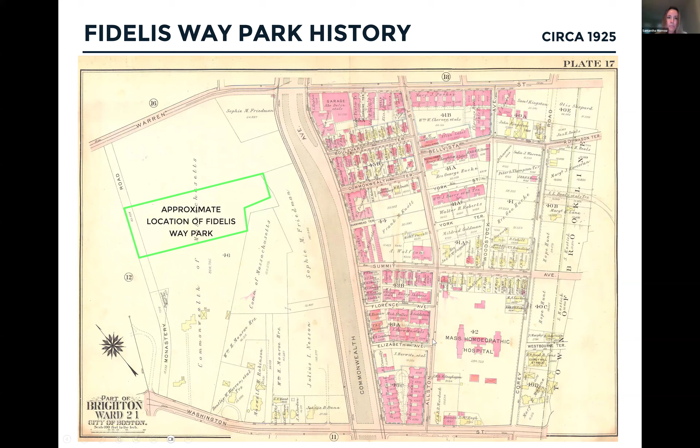That brings us to 1975, which is when the park was constructed. For those of you here familiar with the park, you'll see this has not really changed much from the original design, and today's park design elements remain in the same orientation as shown in the plan above. The initial design of the park included those basketball courts you see today, the plaza area, and a little tot lot playground with lawns surrounding either side, and walkways surrounding all of it. In that tot lot area there was a water play feature.

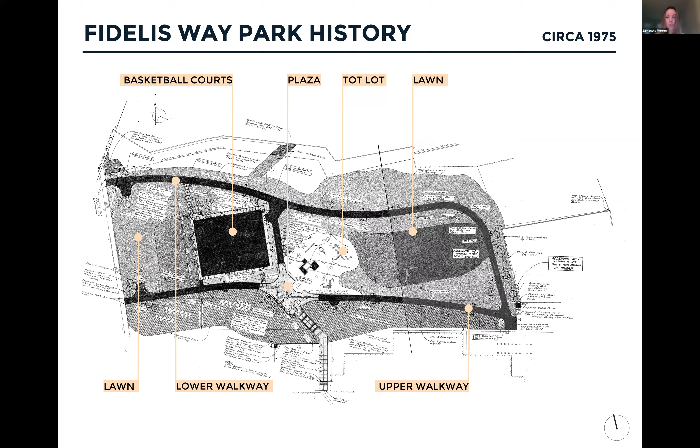We also noticed in this plan that a lot of the trees you still see today surrounding those walkways were planted during this design. Another thing we noted looking at these plans from 1975 was that there was a lot of drainage infrastructure installed, so various drains and manholes throughout the park. So for us, we thought it would be important to make sure all that is functioning properly in the next steps. Next slide.

Again, on the left we have a zoomed-in image of those plans from 1975. On the right, this is showing the next time the park was renovated, in 1993. That design really was just focused on the renovation of the play equipment itself. It removed that water play unit and put in new play equipment, which is also the same equipment you see out there today. They also added those large tulip trees surrounding the playground today, planted during this '93 redesign, and installed some new water and drain lines. But other than that, in '93 that was kind of all that really happened. So the rest of the design of the park and its elements remain mostly unchanged.

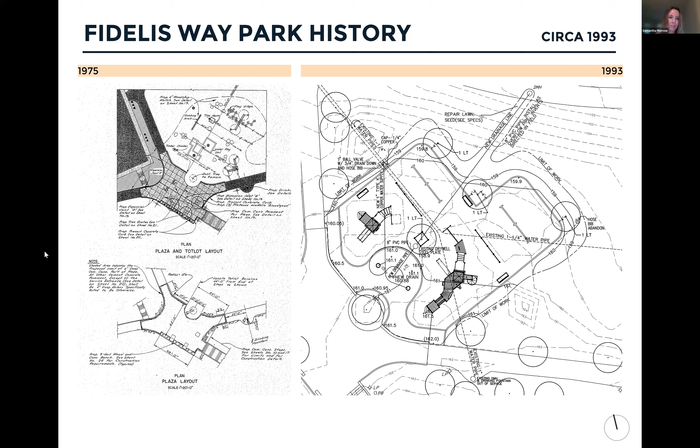Before we talk about the park, we're going to talk a little bit about the neighborhood around it, starting with a slide to help orient ourselves. Fidelis Way Park is adjacent to Commonwealth Ave, located between Washington Street and Warren Street. If you haven't been to the park, you might not have seen it because it does not have any street frontage.

But there are a lot of landmarks around it. To the north, labeled number 1, is Brighton Marine Health Center. To the south of the park is the Boston Housing Authority Commonwealth Development. At number 3 is Overlook Apartments, which used to be St. Gabriel's Monastery. Number 4, on the corner, is the former St. Elizabeth's Hospital, now Boston Medical Center Brighton. And at number 5 is Brighton High School. People are probably familiar with this block, and Fidelis Way Park is right in the center of it.

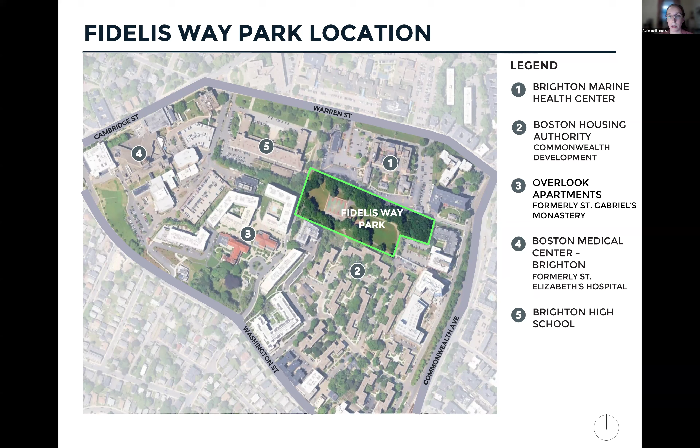When we started to study this neighborhood, one thing we really noticed is the density of community institutions around this park. Within a 5-minute walking distance, you have 3 different hospitals or health centers, 3 schools, and of course the BHA Commonwealth Development. Going a little farther, into the less-than-10-minute radius, there are some religious institutions, another health center, the Boston Public Library Brighton, and the BCYF Jackson Mann Community Center. Our takeaway is that this area brings a lot of people in - it's probably not just neighborhood residents using this park, but also people attending school here, working here, or coming for medical appointments.

In addition to all these community institutions, there are also other parks and open space. There are no other parks within a 5-minute walking radius, but there are 4 within a 10-minute radius. Right at the edge of that radius is Brighton Common, a long space with a stage and amphitheater, kind of an event space. Number 3 is Joyce Playground, which in its amenities is similar to what's offered at Fidelis Way Park - a playground, sports courts, a water play feature, and some public art.

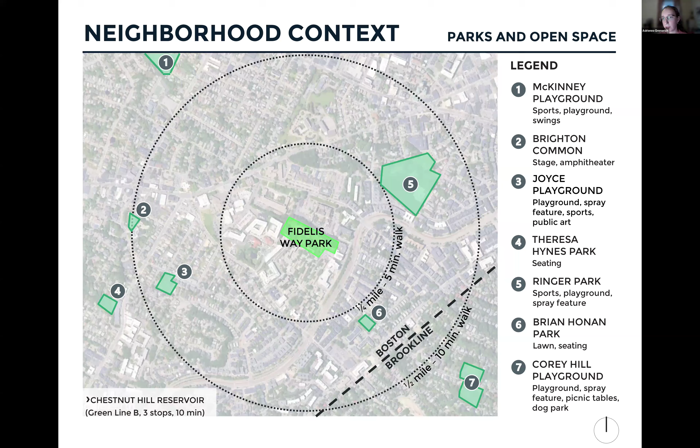Speaking of transportation, our last piece of neighborhood context is transportation and how people are getting to this park. The park can be accessed on either the 57 or 65 bus routes, as well as the B line of the Green Line. If you're taking the 57 bus, you get off on Cambridge Street, walk down Warren Street, and use a set of stairs to enter the park.

If you're taking the 65 bus, you'll get off on Washington Street and walk on Pamela Donovan Road, which takes you through the Overlook Apartments, then down some stairs into the park. From either the Washington Street or Warren Street stop on the Green Line, you could walk up some stairs from Commonwealth Avenue. If you want ADA access, or if you're driving, you would access it via Fidelis Way, which goes through the Commonwealth development, taking you up to the parking lot at the southeast corner of the site - that is where the ADA access is.

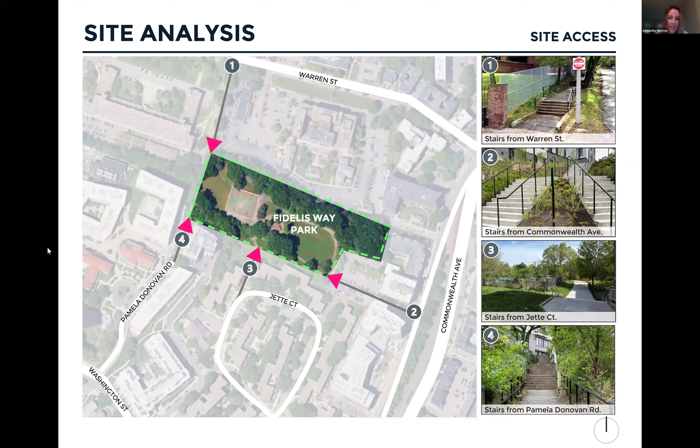The green circles indicate the existing trees on site. So you can see there's a lot of existing tree canopy and some great wooded areas on site. Moving from left to right to talk about the different site zones, we have an open lawn area adjacent to Monastery Path.

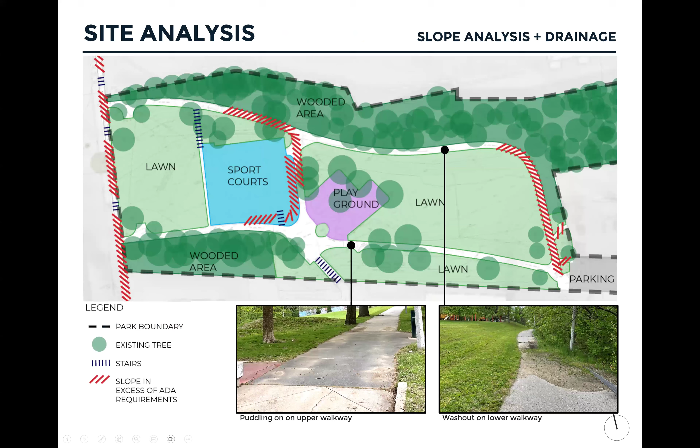I think, having walked over there, and I think I was on crutches at the time, so I wasn't so nimble on my own feet, but the one thing that strikes me, going from Warren Street across from Warren Street up through to Fidelis Park, is there's so many steps everywhere you go. Even if you're a wheelchair user, it's impossible. If you're pushing a kid stroller, it's pretty difficult. So I think the accessibility issues are immense here.

The other thing is, I don't know, I need to go back, because it all was approved before my time on City Council, was the access. I anticipated that there would be vehicular access from Commonwealth Ave through to the park without going through Jette Court. And the parking that you mentioned earlier at Jette Court, I think, is BHA parking for residents of Jette Court, so I don't think the general public have access to that. And if you do park there, you'll get towed. Maybe I'm getting that wrong, but that's.

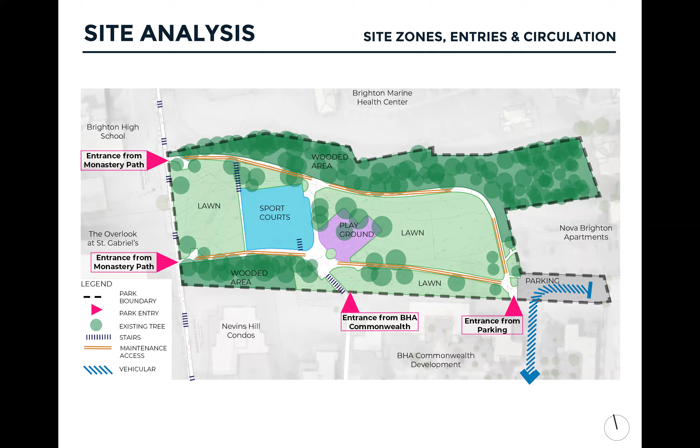Another suggestion for engaging with the Commonwealth tenants over there and the families: they will be holding their Unity Day celebration at the Commonwealth Housing on Saturday, August 16th, from 12 to 2. It might be an idea to have a table over there and get their ideas right from the perspective of families that live right there.

Absolutely, thank you for mentioning that. So I think, to answer your question about activities...

I noticed, and I put this in the chat, especially in the winter when there is snow, the slope is actually pretty cool, and there's a lot of kids that go sledding on the hill. I don't know if you were aware of it, but that's something that is really well liked, and I even see people from the neighborhood or even farther come in the winter. So I think regarding the hill—

There's a ton of lawn on both sides, and even though I like it even for my dog, I think it would be nice if there were activities aside from a potential splash pad, such as pickleball. It's becoming more and more popular these days, and I know you had that, and it takes quite a bit of room, and there's flatness and accessibility. But I think it would be really cool to have another amenity that could draw a lot of people to the park and make it more well known, since there aren't that many pickleball courts in that area — there are some in Brookline, but not really in this Allston-Brighton area.

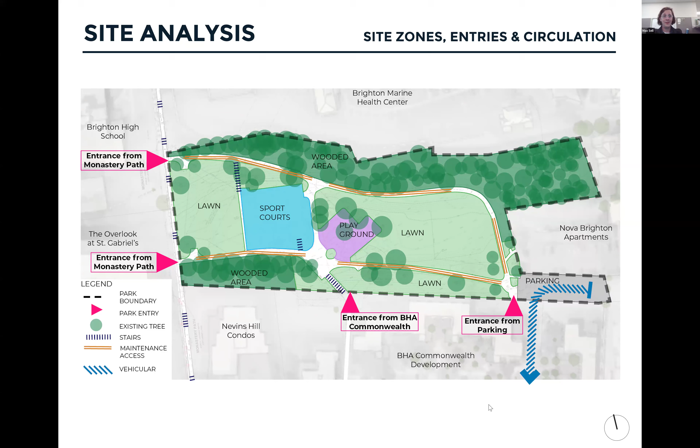Thank you. One thing that we haven't touched on in this meeting is the cobblestone swale around the basketball court. I'm curious if anyone has anything to say about that — I haven't seen anything like it before. And if you don't, that's okay too.

This was not an uncommon feature in our parks at one time. A lot of times this was done to help with erosion and to provide a place for people to sit. We have replaced some of these cobble edges in the past with tiered seating and other things. Do people use that edge to sit on, or do they just avoid it?

They use it. Okay, do they like it as it is, Natalie? I see you nodding — or do you think terraced seating would be better?

So I think I see people both using it to walk, which I feel could also be a little bit of a trip hazard personally, but I see them doing it, climbing up and down when they play basketball or throwing balls from the basketball court up to the path.

I do think that what is really missing in the park right now is there is not that much great seating. Depending on what you do for seating, it can also create a natural opportunity while also dealing with the slope. I also saw in the chat someone mentioning tables with shade as well, so it would be great for people to be able to eat there and picnic. Right now it's pretty much not present.

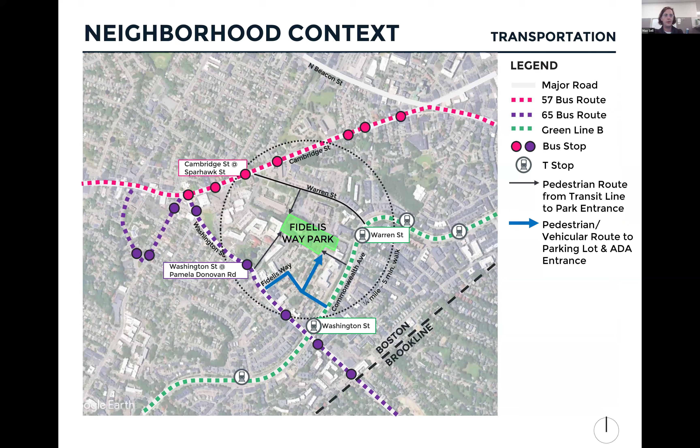I just wanted to ask one quick question, feel free to put it in the chat if you guys would like. We always try to make sure that we get the word out, and I know that we heard about getting more folks from the Commonwealth housing to be able to join as well. Are there other places in the community that you guys would suggest that we flyer or that we reach out to that maybe we hadn't, because we always want to be expanding that? And Councilor Breadon, you may have some ideas too, but feel free to email Max or drop things in the chat, because we do want to make sure that we get those voices. So please do feel free to do that. Thank you, Lauren.

Hi, I see Dan, you have one more question. Go ahead, Dan. Yes, thanks. No, it was just to Lauren's response there. It would be great if you worked with the youth worker, the Boston Housing Authority youth worker, his name's Roe. Perhaps you could have some children answer some survey questions on how they like the park, that live in Commonwealth tenants. He organizes the youth up there.

So just a thought to answer questions that you just had on that. Thank you. And Dan, if you have that contact for Roe, or if Councilor Breadon does, that would be wonderful to share with us. Yep, good idea, we have it. Perfect, thanks.